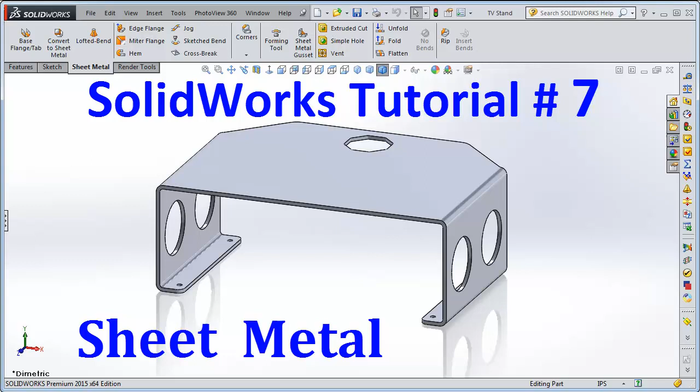This tutorial talks about working with sheet metal, bending items, and coming up with flat patterns. We're going to make this item here. It's very similar to the item we made in the previous tutorial, only this time we're going to make it out of bent sheet metal.

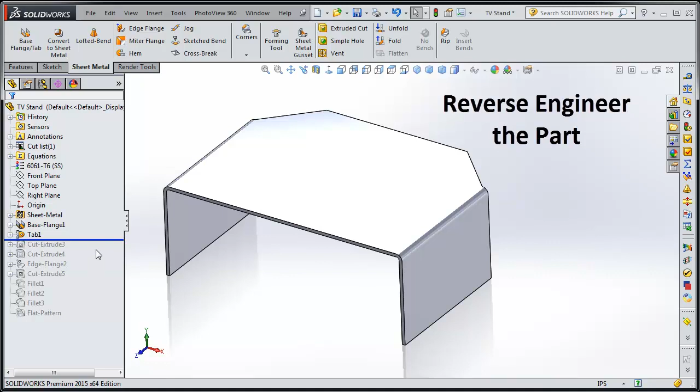So what we should do first is go ahead and reverse engineer this part. We're going to pull this up to our first item, and this is what we're going to make. We're going to go down and add this end to it. We're going to cut some holes through the sides, cut a hole through the top, add some bottom pieces, cut some more holes, and then add some fillets. And then we'll soften up these edges inside.

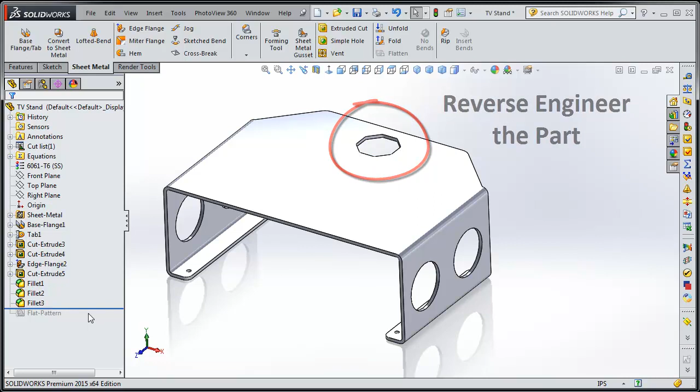Also, we're going to show you how to look at the flat pattern of a bent sheet metal part. And then at the very end of the video, we'll show you how to save it as a DXF file to send to the laser or the water jet.

So let's open SolidWorks. Open up a new part. You can use the tutorial. I'm going to use this part.

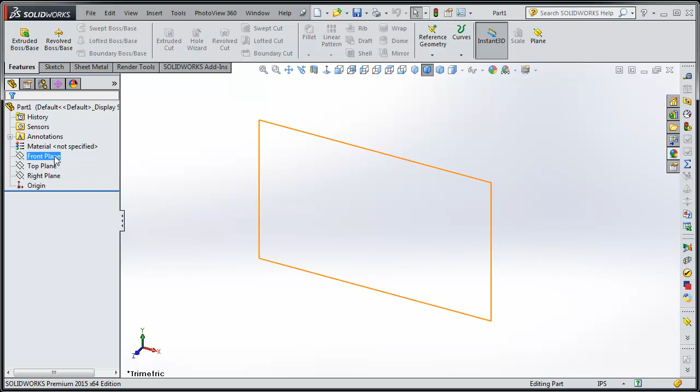Let's start on the front plane. And we're going to draw the shape of our first part of our sheet metal.

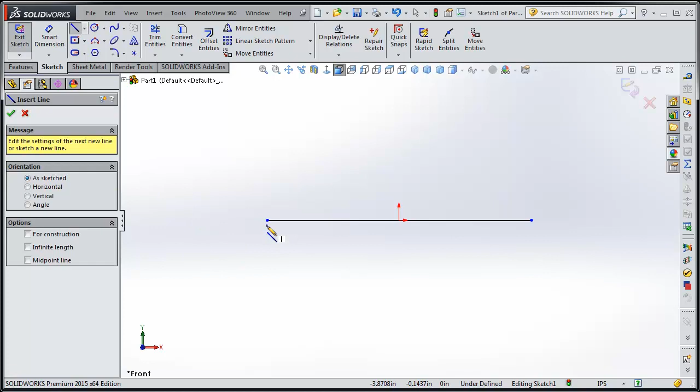Click on the line, hold down Control key, click on the origin. Draw some more lines for the sides. Click on the line, hold down the Control key, click on the line, click equal.

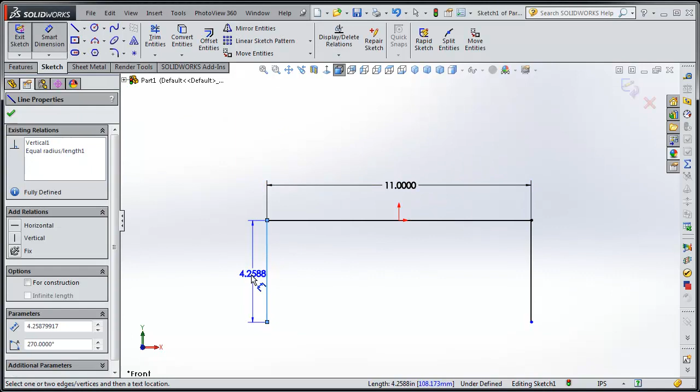Dimension the item, we're going to go with 11 inches, and we're going to go with 4 inches. So we just created a shape.

Now we're going to click on the sketch and highlight the sketch. Then we're going to go to sheet metal. Now if you don't see this, right click anywhere in this area on one of those buttons and you can check it and turn on the sheet metal. If you want to get rid of items, click in an area up there anywhere and then hit the check button or check it off and get rid of it. So let's click in sheet metal.

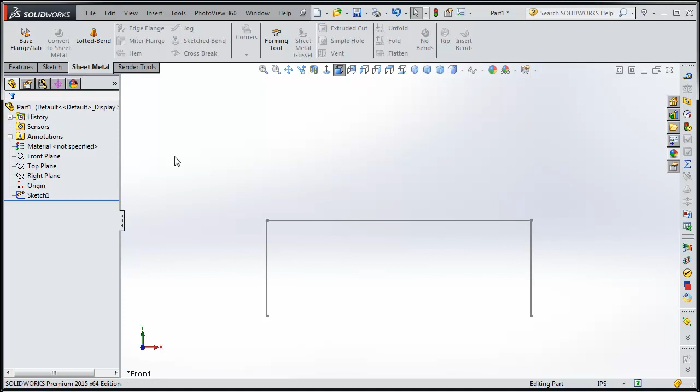Now we're going to highlight the sketch and click the base flange tab. You might not see direction 1, so click those little arrows and you'll see it. We're going to make this 6.625. Thickness of our metal is 0.104. We can reverse that direction. It's easier to see if we look right at it.

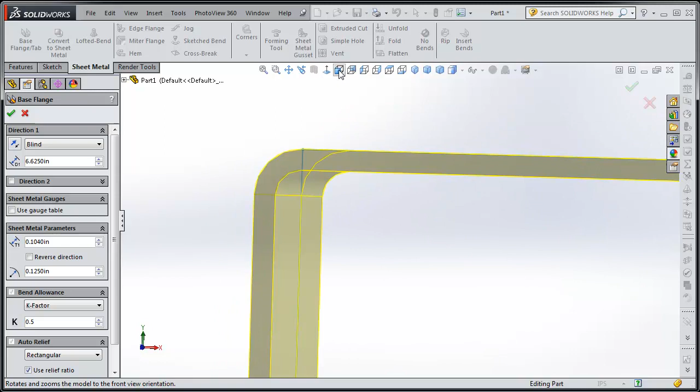You can see our guidelines there, the little blue lines. We can either have the metal inside those lines, so it holds to the 4 inches by 11 inches, or we can put it on the outside, so the inside of the metal will be 4 inches by 11 inches. It's your choice. You can always change it later.

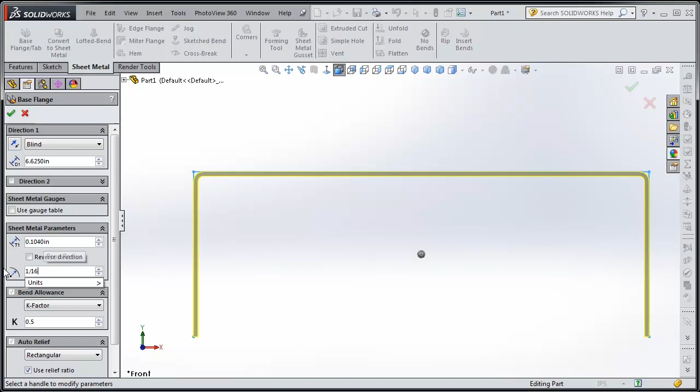And that right there is what the punch will be that goes and bends this. We could make it 1/16 of an inch, a little tighter bend, but I like a little looser bend. So let's do 0.125 radius of the punch tool. And since my metal's 0.136, let's make it 0.136.

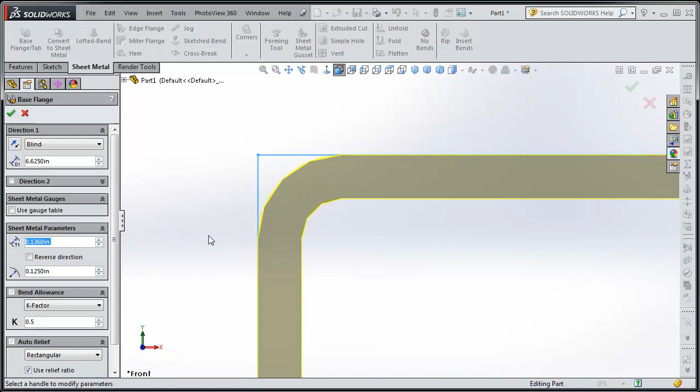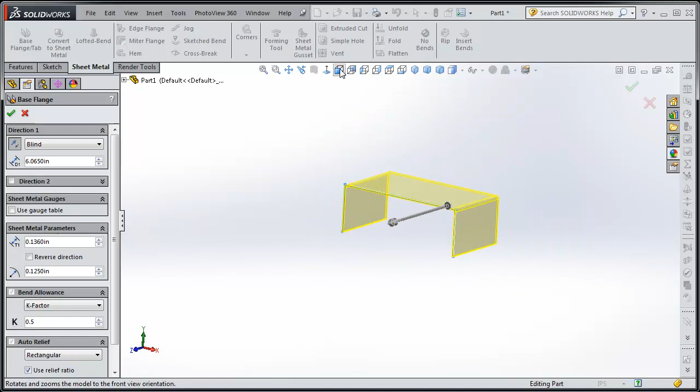Now it's 6.625, but I kind of like it to go the other direction, this direction over here. I could slide it over there, but I rarely do that. I usually just change it up here with this button. I can make it go whatever way I want. Let's set it back to 6.625. 0.065 - I see I changed that a little bit. We'll leave it, that's good enough for now. We can always change it later.

And there's our item. We can flatten it. Gives us some guidelines where it would be bent.

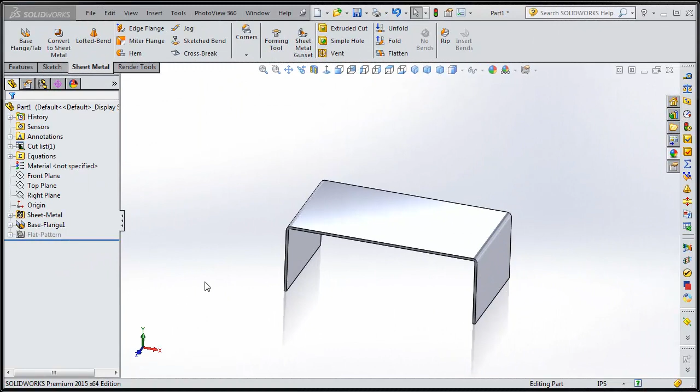Now we're going to add this part to it. So we'll go to the top view and we'll click on it because that's where we want to add it. Click on sketch, sketch again.

Let's go to where that bend starts. We don't want to go past that or it'll notch it. So we can see that where the little orange dotted lines are, that's about where we need to go. Click on the center line, wake it up, and then click on it. There you go.

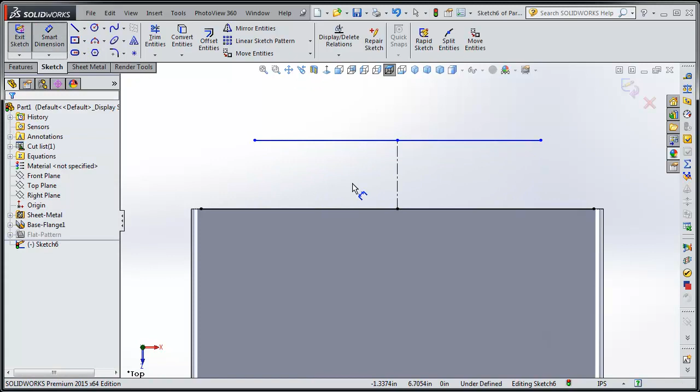Now that was just a guideline. Here's the back piece of where the plate's going to end up. Hold down Control key, click on the dot, and hit midpoint. We're going to run it up 2 more inches.

Going to connect to that other line. I'm going to do it on the other side now. I'm just hitting the Escape key whenever I want to get done with these lines. I just, right now, hit the Escape key, then it goes away.

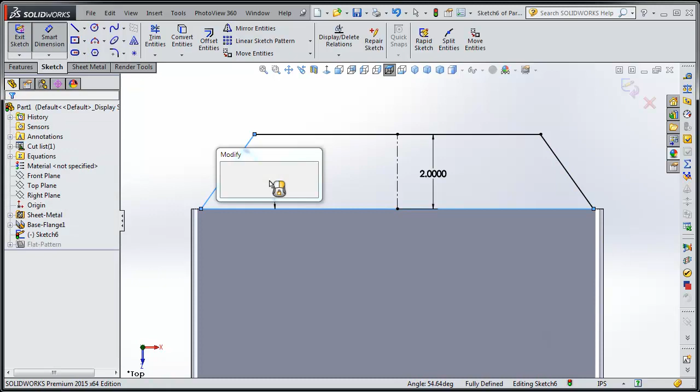Let's dimension that at 45 degrees. And because we have the 2 inches there and the midpoint relation on the back line to the front line, the other angle will be 45 degrees as well. All the lines are black, so we know it's fully dimensioned.

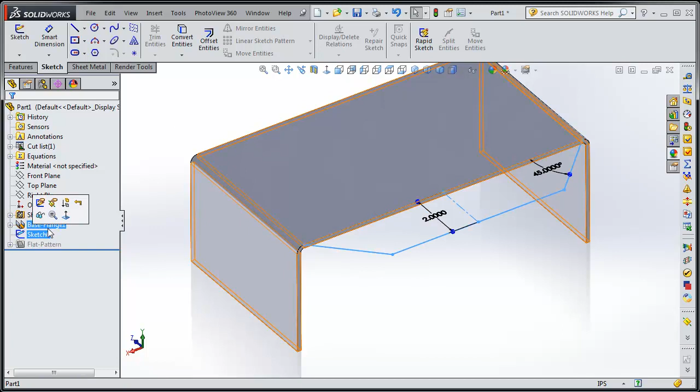Click on the sketch to highlight it. Now we could go to there, but we don't want to do that. We want to go to sheet metal still because we started a sheet metal part. Click on the base flange tab. It automatically follows the way the metal's going to go. And there it is.

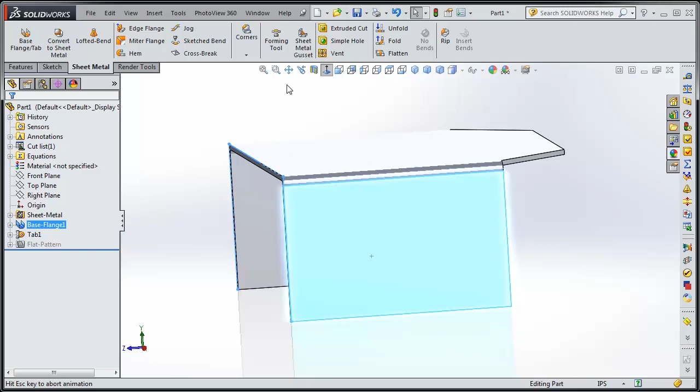Next, we're going to draw some holes in the item on the sides. Let's do it like we did in the part on the last tutorial. Let's do it with the side first. We start a sketch on the side. Then we're going to bring up a center line from the bottom. We're doing it a little different than the last tutorial. Many ways to do the same thing. Click on the line, click on the dot, click on midpoint, holding down the Control key.

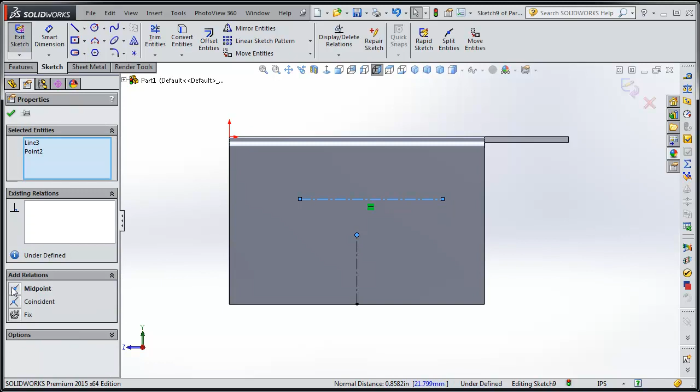Let's add some circles where the holes are going to be. Hold down the Control key, click on the circles, hit equal. We'll make them 2 inches. And then we'll dimension their distance apart.

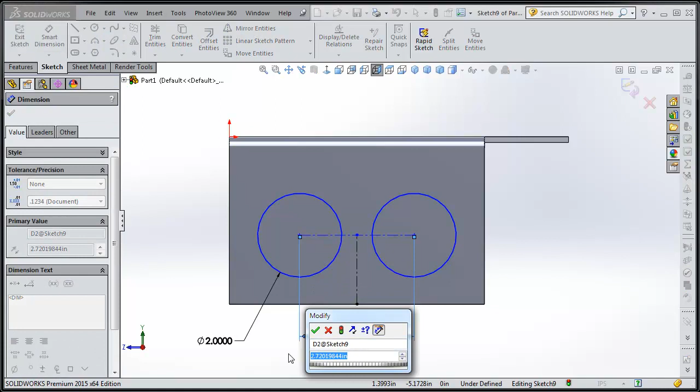I tape these ahead of time and then I put the audio on, so I'm just kind of stuttering here because I don't know what's coming up next a lot of times.

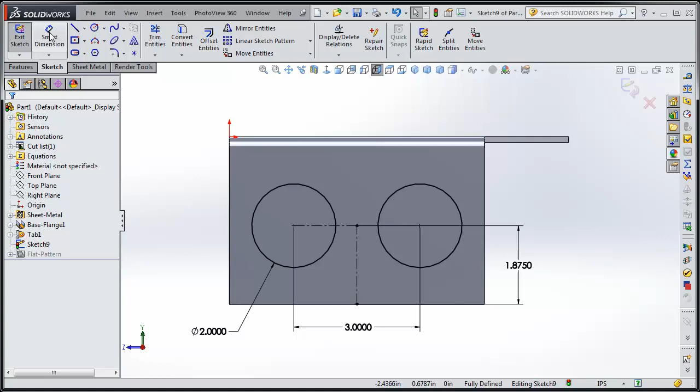So we're going to change this to 1 inch, but we really want it 1 7/8 inch. So 1 plus 7 divided by 8. And then we press enter and it does the math for us, 1.875. No big deal there, but if you need like 15/64, it comes in kind of handy.

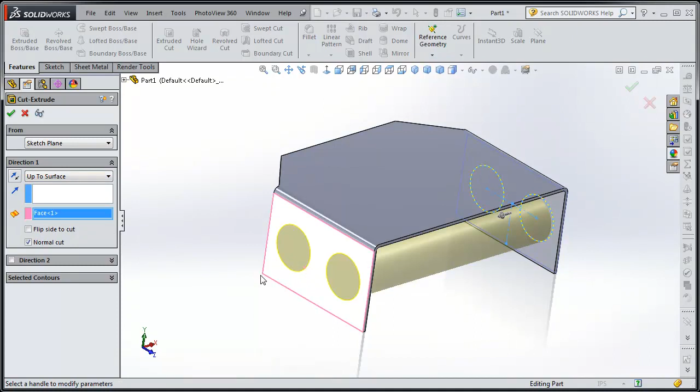Alright, so we're going to run these all the way to the other side. We're going to cut all the way through to that other side. So make sure the sketch is highlighted. Go to extruded cut. It doesn't have to be in the sheet metal area. Any extruded cut will work. And then up to this next surface. And there you go. Just like the previous tutorial, we cut the holes through both sides.

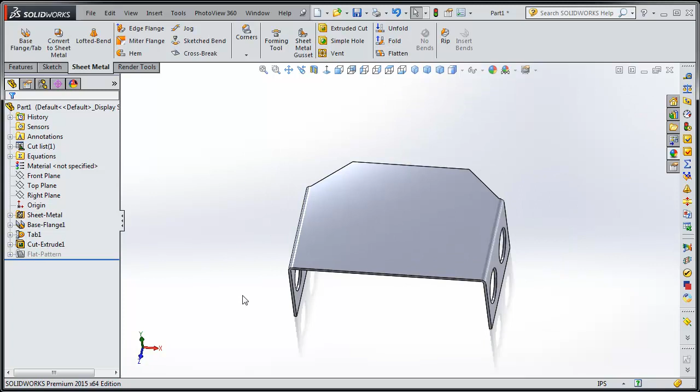We can flatten it. You see it'll cut the holes where it needs to be, and even with your bend deductions, your part will end up correct when you bend it. Now those holes right there, let's go ahead and delete them, because in my videos we do the same thing over and over.

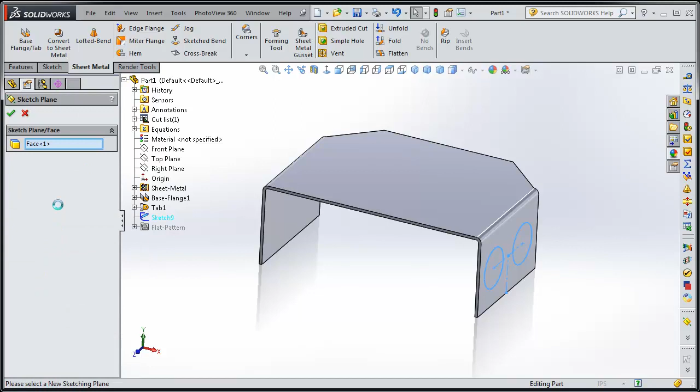Now let's put that sketch right there in the middle. So we right click on the sketch and then go up to Edit Sketch Plane. And then we click on it. And it says it's on face number 1. It is showing there. Now we want it on the right plane, which is really kind of in the center. It is in the center of the part. Click the green arrow, and now we've moved the sketch over to that plane. It's that simple. It holds all the relations, everything. So works great.

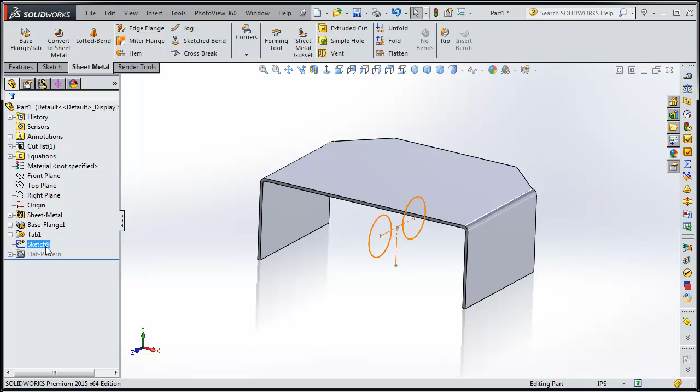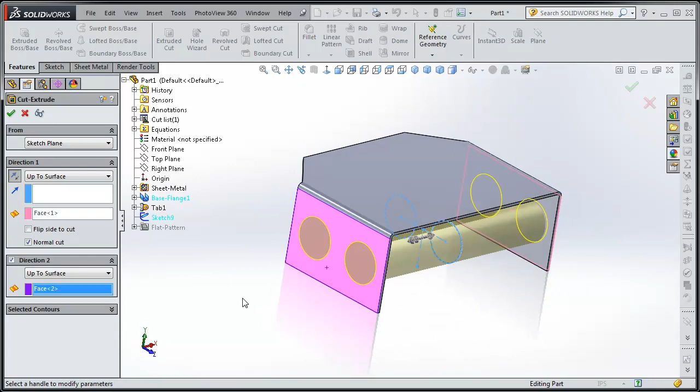Click on the sketch. Click on Features, Extruded Cut. Now this time we're going to go up to surface one way. And then for direction 2, we're going to go up to surface the other way. So there's another way to cut the same holes. If the sketch is showing, click on it, click on Hide, and it'll go away.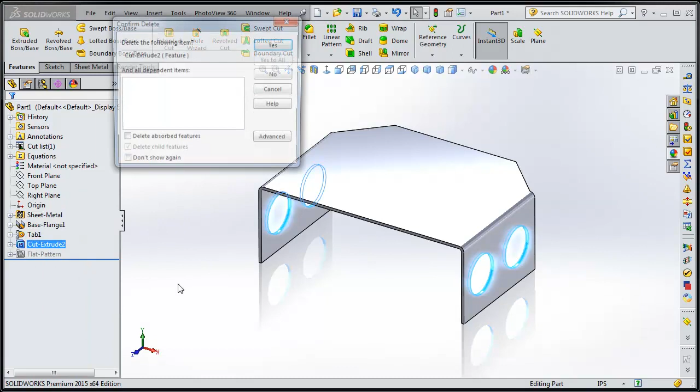So we did the same thing one more time. But we're going to do it again a different way. Now that we've moved the sketch directly in the center, we can hit Extruded Cut, and then we can do Through All Both. And we did the same thing one more time. We can flatten it.

Next, we're going to add this little vent hole on the top. So we're going to go up here to the top.

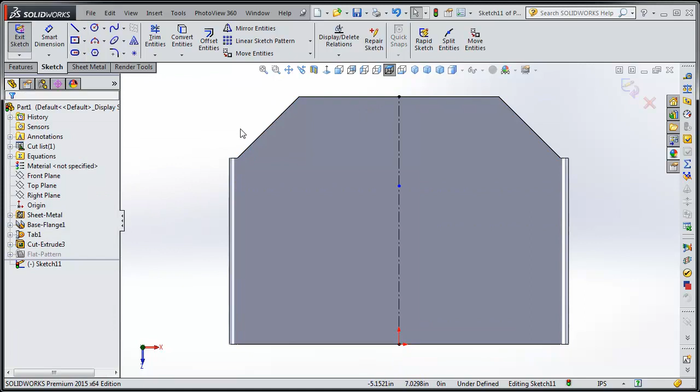Click on it. Click on Normal To so it's a better view. Click on Sketch. I'm going to make a center line, or I like to call them guidelines. And then let's use a polygon. But instead of 6-sided, let's go ahead and make this, how about 8-sided?

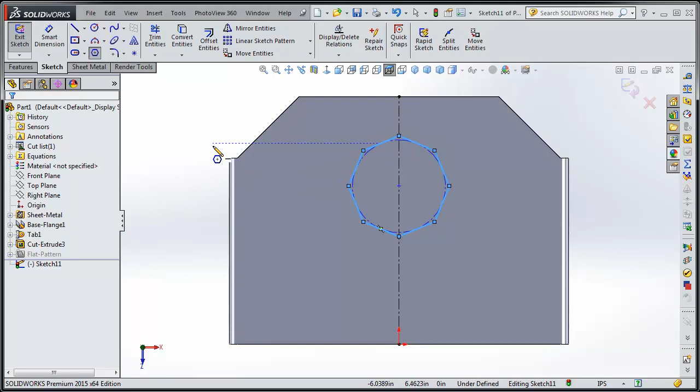Now we don't want it pointing on the top, we want it kind of flat on the top. So hit the escape key and get you out of the polygon. There we go. And you can actually move this around. But you can set up a relation so that you have a flat edge facing up as you're looking at it. So we click on the horizontal, and there you go. And then we dimension it by dimensioning the circle inside of it. So that takes it from one flat edge to the next.

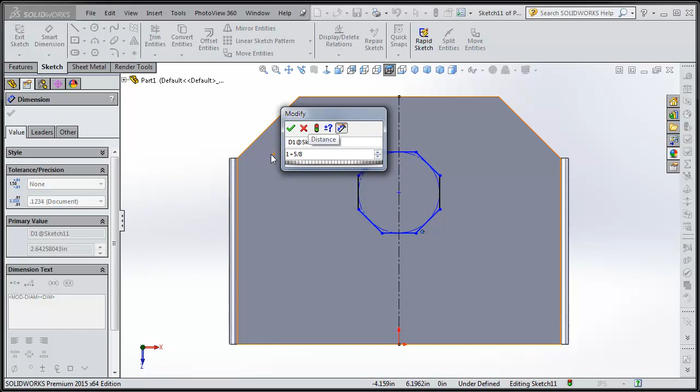The other side, let's make it 1 plus 5/8, so 1.625. Now we could dimension it from the center of the circle to the edge. If you do that, that would be one way we could do it. But we're more concerned about how far that edge is right there from this other edge. So why not just dimension it from there?

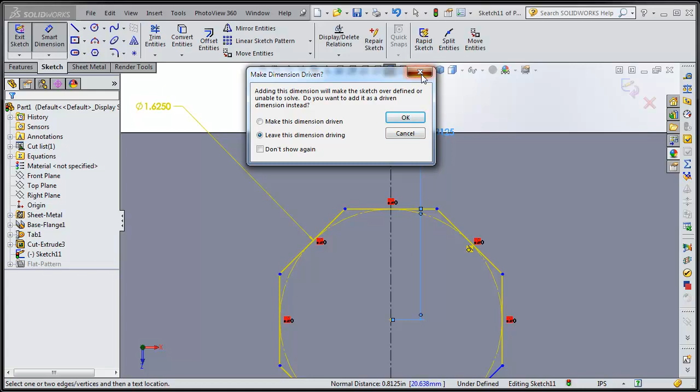Well, if you get a little screw up, no big deal. You probably didn't do anything wrong. Just try it over again. Click on that, and then click up here on this other edge. There we go. And we wanted a 1/2 inch, 0.5 inches away from that edge. So you don't have to dimension from the center all the time. You can dimension from one edge to the other edge if that's the point that matters to you.

I have a bad cough, so I'm just really stumbling through this, stuttering, because I'm trying to keep from coughing.

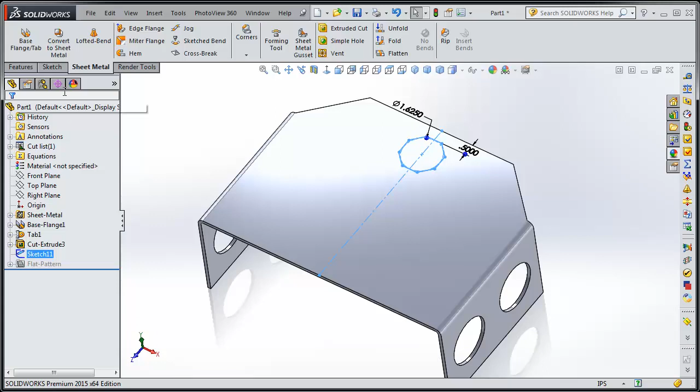So anyway, highlight the sketch, and you can go up to the Extruded Cut in Sheet Metal, or you can go to the Extruded Cut in Features. It doesn't matter with the cuts. You can use either one you want. So we're going to use the one in Features. But there's this interesting thing. With sheet metal, you have a link to thickness, because you set your metal thickness. So any of these cuts that you make, you can go ahead and set them to the thickness.

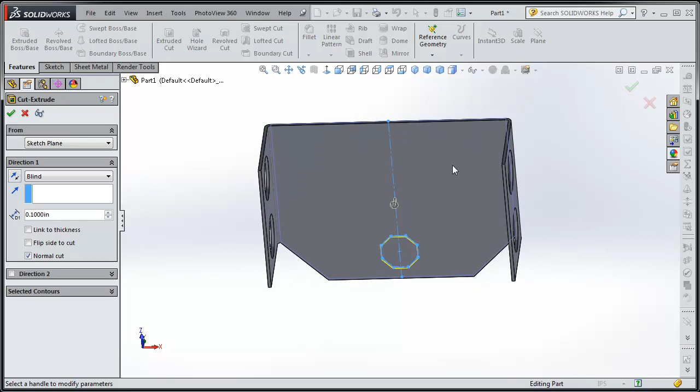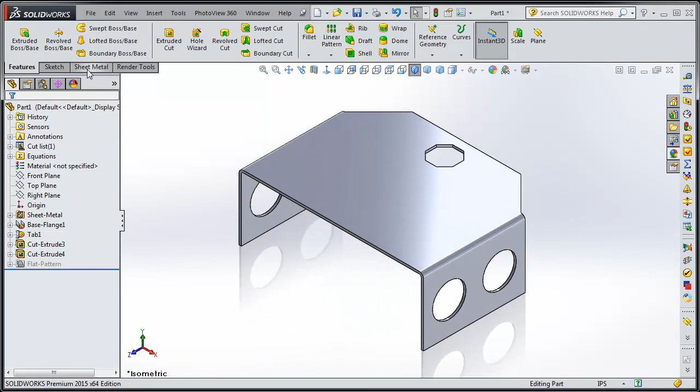If it's just going through the metal. Now those sides wouldn't have worked because we were going all the way from one side to the other side, so you would have had to do one side at a time. But for now, let's just try that link to thickness. And as you see, it's just kind of like going from surface to surface, and it cuts right through. It's kind of handy on some parts. That way, if you change the thickness of your sheet metal, your cuts won't only go partially through if you're using a blind depth. So as you can see, you can flatten it. Everything looks good.

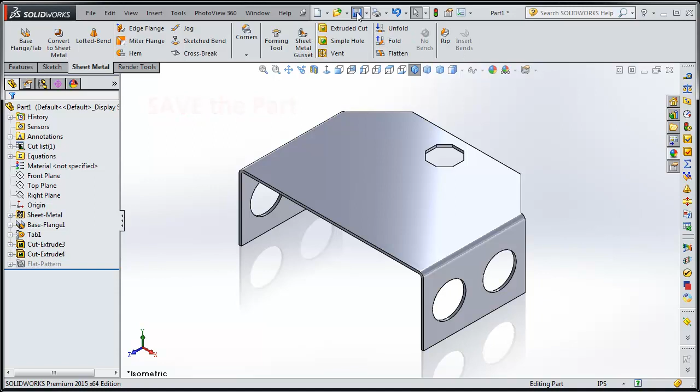And we have that. Next, we're going to put these little tabs or feet onto this little TV monitor stand. But I haven't been saving the part. I would have suggested long ago to save the part if I would have noticed, but save your part a lot. Do it right away so you don't lose all your work. So we'll go ahead and save it now. But now we're going to put those little feet on. Tabs, edges, whatever you want to call them.

So we're going to use this edge flange. It's going to ask us for which edges we want to put it on. And we can pull it either direction. We can use all these features, but for right now, pick your edges. We're going to pick there. We can slide it this way or that way, but we want it to come in. Click it there. Now we could have stopped there, but we can do both of them at the same time. And we just click on that edge, it'll make them equal, so we can make them both the same length. If you wanted them different lengths, it might be easier just to do them one at a time.

Let's go ahead and set them to be 1 inch. And there's some interesting things here. It's best if you just play with those, then you'll see what they do. Same with this material outside. We're going to use the material inside. Sometimes you do the bend outside, but you have to play with it. If you're doing sheet metal, you should understand sheet metal, but do the material inside, because what it's going to do is it's going to keep all the material inside of our 11 inches there. So that's what we're going to use.

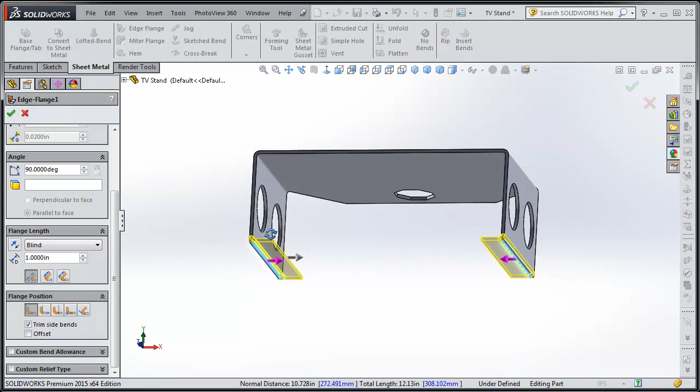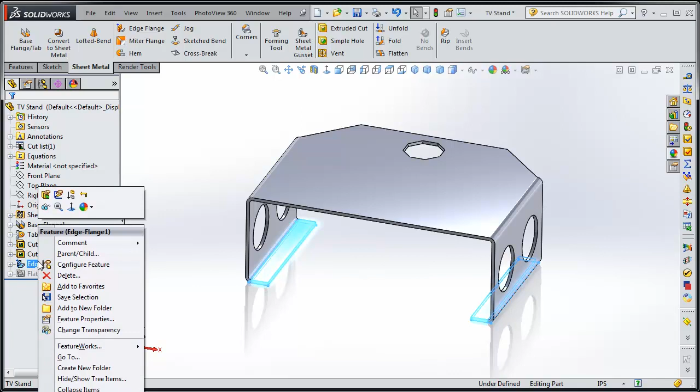This part wasn't so crucial on that, but those first two edges we did, if we would have made them through this way, would have mattered. I'm explaining too much here, just kind of follow the video and you'll see. Just click on the two lines and they'll kind of happen for you. There you go. Best way to do it is just get in there and play with that, try different settings. So I chatted a lot there, so we're going to do it again really quick here.

So to start off, we go to sheet metal, hit edge flange, click on the lines to get some edge flanges, set their length at 1 inch. We're keeping the settings. Click the green arrow. So it's that easy.

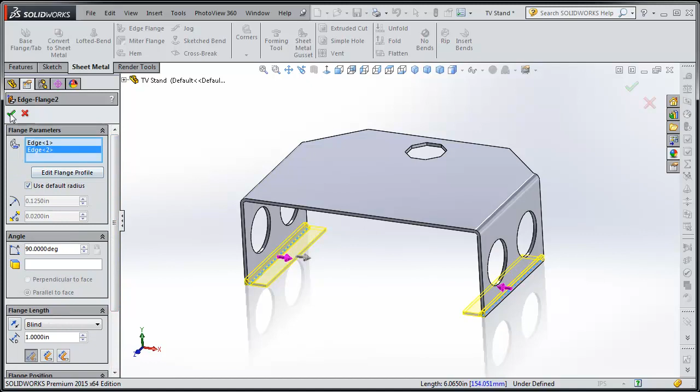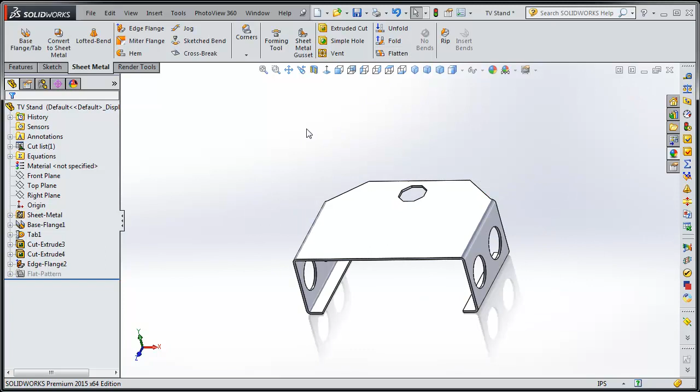Save your part. You can flatten. And you see, it gives you all the little bend lines. In your drawing, if you made a drawing from this, it would tell you exactly how far you need to set your CNC press brake to bend those.

Now we're going to put in these little holes in the bottom in case you wanted to screw in some little rubber feet to this or wheels or whatever you want. So we need to go down and do it off of that edge. So hit the edge, hit normal to. It'll kind of take you right to it. Click on it. Click on sketch.

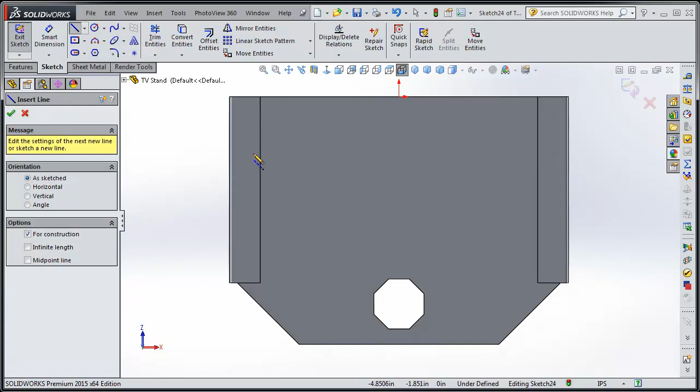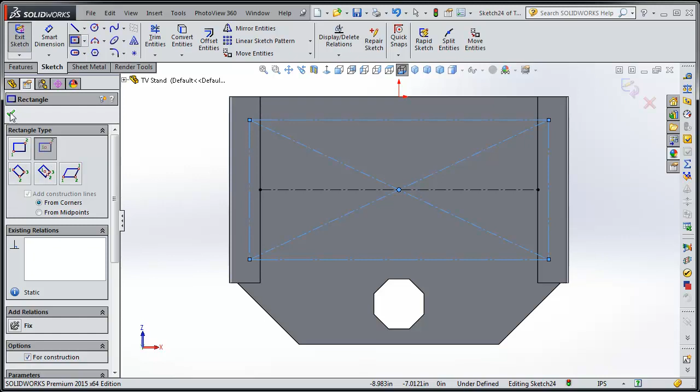Now, if we use that line there, we can probably use the midpoint of that and use a rectangle guideline to make our holes. Kind of speed up the process. So if we click in the center of that now, pull out a rectangle, and don't do anything, leave it highlighted light blue like that, and click on for construction, and it'll make it the dotted lines, the guideline. Now we can draw our circles on that, and it'll hold them all together. Little time saver.

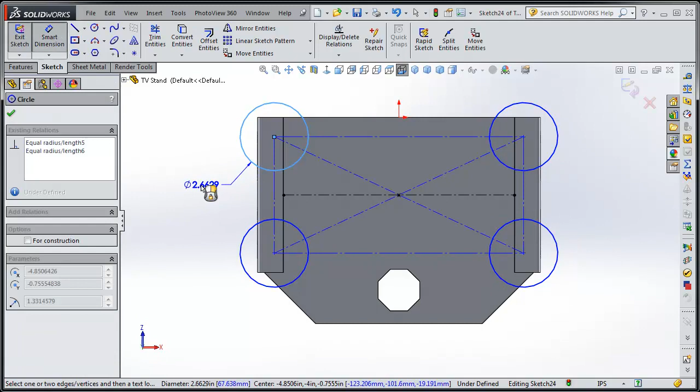Once again, hit escape if you need to get out of the circles. It's still making circles. Hit your escape key. Hold down the control key, click on all the circles, click equal. And now all you have to do is dimension one of them. And we want to make it a little bigger, so let's make it 3 divided by 16, or 3/16, or 0.1875. That math is kind of handy if you're using fractions.

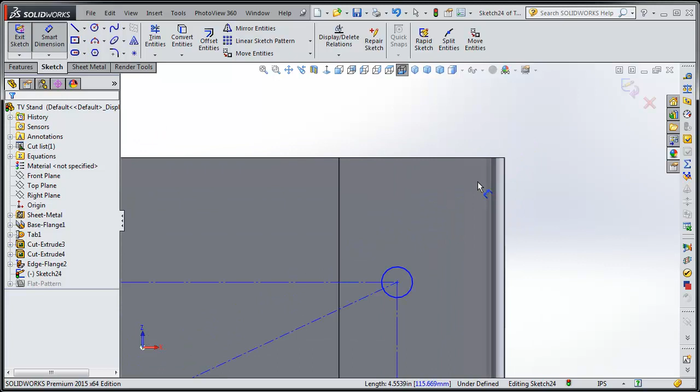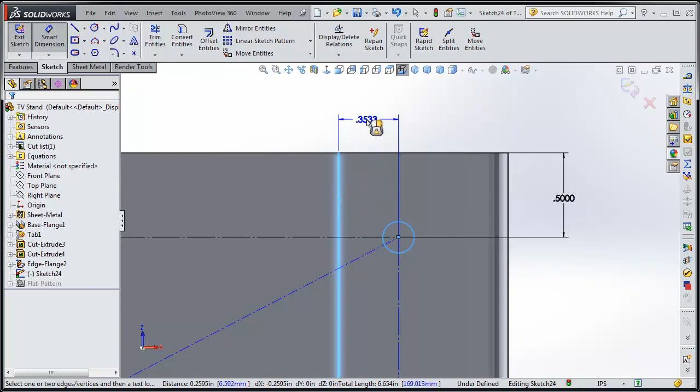So this is where it matters. So it's dimension from there, to the center of the circle. Let's make it 0.5. Once again, not set in stone. You can change all this stuff later. And let's make this 0.5.

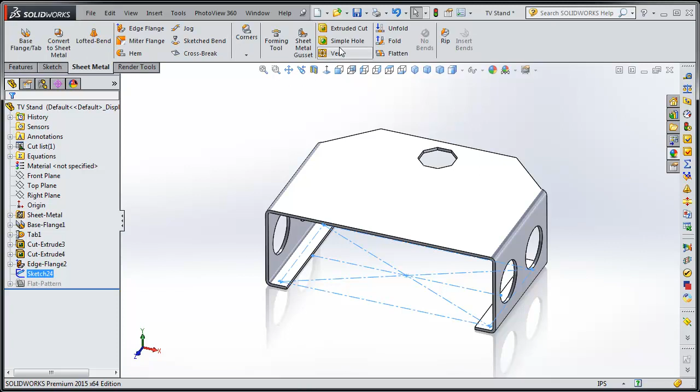And then let's go ahead and go through that. Now, since we used the link to thickness, it'll probably still hold that. So if we click on Extruded Cut in Sheet Metal, yeah, it went automatically to link to thickness. Now, we don't like that hole. It's a little close to the edge. No big deal.

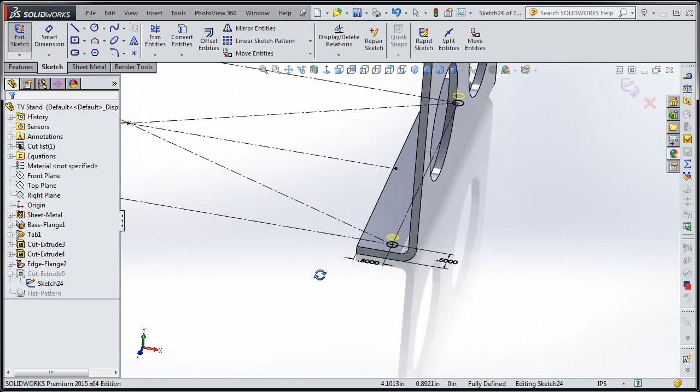Go down. Right-click on the sketch. Click on the sketch to open it. Just go down there and find the dimension you don't like and change it. And since we used that little guideline rectangle, all we have to do is change one and it changes them all. There you go.

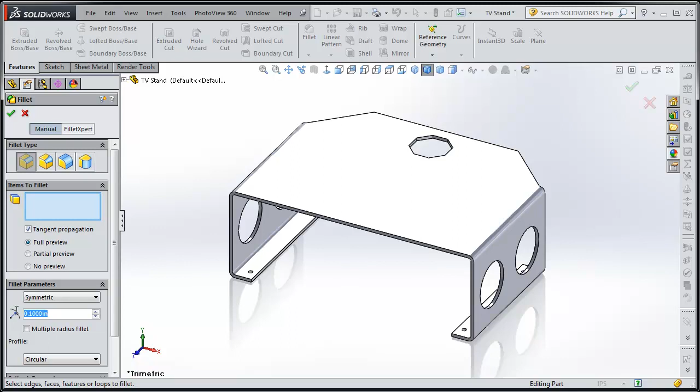Now we're going to put some fillets on this because we don't want any sharp edges to catch on cords or fingers or arms or anything. So let's go ahead and set these fillets. Let the laser or the water jet cut them for us, so we're not having to worry about them. And let's do some on the back, but let's make those a little bit larger. How about a radius of 0.5? Kind of soften up the edges a little here.

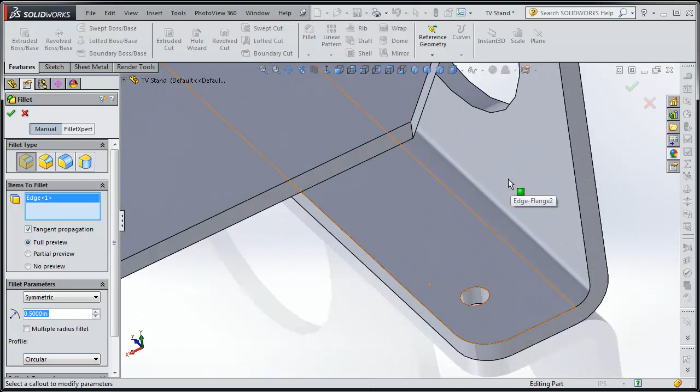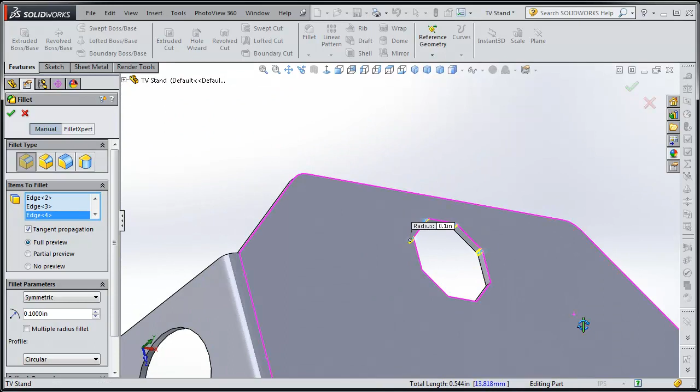There we go. Now we're going to have a cord running through this back hole. So let's soften up those edges as well. That'll make it a little easier to run our deburring tool. If you happen to hit the wrong thing and it turns a big blue area, just click on it again, it'll go away. There we go.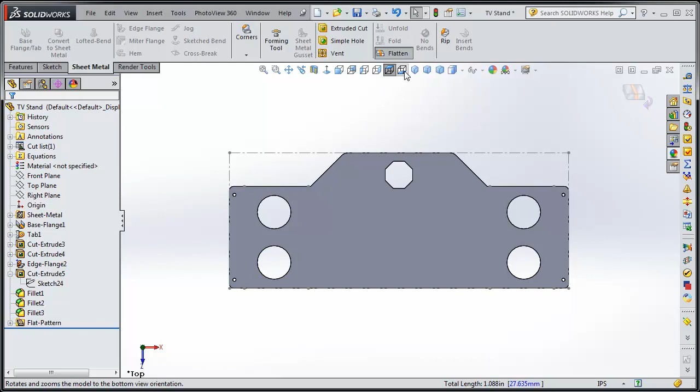Now we have the top hole. We can flatten it. Everything's holding true. You click flatten again to make it go back.

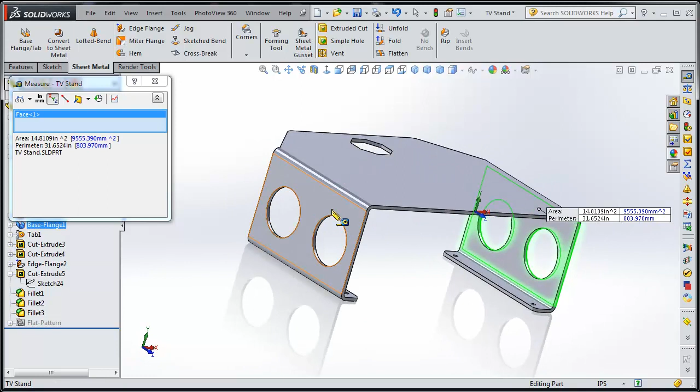Now if you don't understand bend deduction, read about them, because your metal won't be 11 inches plus 4 inches plus 1 inch. It'll actually have less metal or more metal depending on the number of bends, because you have things that are called bend allowances or bend deductions. But what we care about is this 11 inches, and that's going to hold true. So when the laser cuts this metal, when you bend it up with the bend lines that it gives, it'll give you 4 inches by 11 inches.

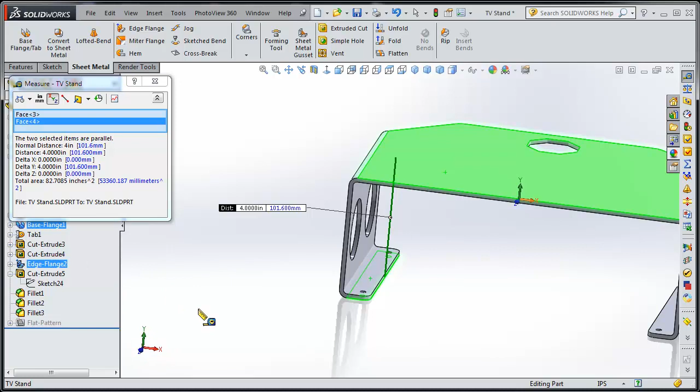So when we drew it to be able to measure it, that's why we set it up this way. So we could check to make sure that our finished part now would be the correct dimensions. Let's check the weight. So if we go to mass properties, we can see that it says it's 0.61 pounds. Now, I think that's like a water weight. It's just a normal weight when there's no material set. So you need to set a material weight.

So go to material and click on it, right click on it, click on edit material, or you can use one of these that are down here in your favorites. To manage your favorites, you just go to manage favorites and then go up to SolidWorks materials, pick a material you want to add to it, click on it, and then click on add. And I'm not going to do it because I already have my favorites done. So I'm just going to go to my material, right click on it, and then I'm going to go down to

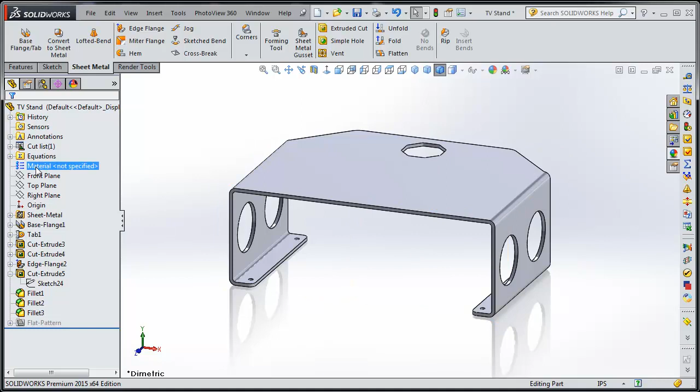A36 steel. Now that may not be the exact thing for this, could have been cold rolled or hot rolled, but we're just using it as an example. Now we're going to measure it. The mass properties. Now it's going to be 4.79 pounds. That's not going to change a lot from this to cold rolled or hot rolled. But it is going to change a lot if we change this to aluminum, 6061 T6.

This is a great way to see if you want to make your part out of aluminum or steel, or what it's going to weigh when it's done. Works in assemblies too, 1.65 pounds. I use this all the time. People want to know how much their things are going to weigh when they get all put together. So there you go. Gives it a nice little view. It kind of looks like aluminum. If you don't like it, you can get rid of it with remove appearance.

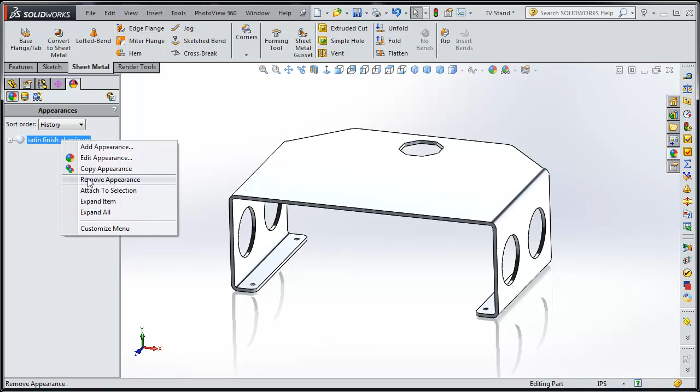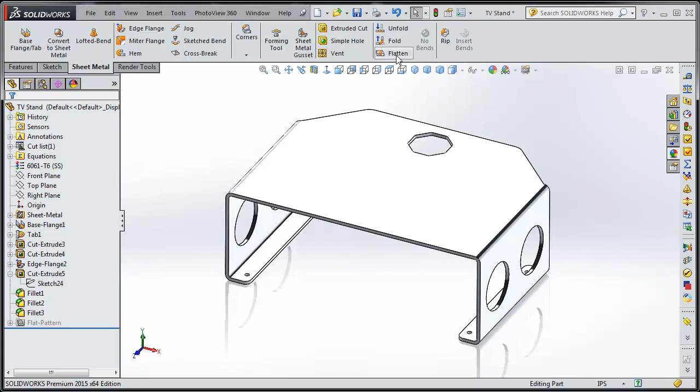It's no big deal on this aluminum, but when you get some of the darker colors, you know, it's harder to see. Like, not so much on bronze, but you can change it to whatever you want. Just because it says it's aluminum, you can give it a bronze or a purple or anything you want. If you don't like it, hit undo. So it gives it a color when you give it a material, but you don't have to keep that color. In a future tutorial, we'll show you all about colors and textures. So that's our item.

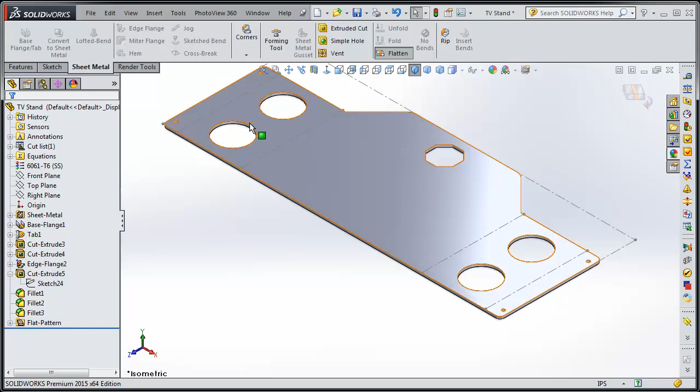Now we're going to go ahead and get rid of that aluminum finish. You don't have to, I just wanted to show you how to do it. Remember, it stayed aluminum for the material, so your weights and everything will stay the same. Just makes it a little easier to see if you're going to work on some more items here. Now, make sure to save it. You see that little star up there next to the TV stand; when you hit save, that goes away, so now it's saved.

Now we're going to save this as a DXF file, an AutoCAD legacy type file. So I like typing what it is in front of it. It just helps me find it. You don't have to do this, but I like doing that. And then we're going to go up to DXF and click on that. Now it's going to save it as a DXF. If you look at the options here, we pull those down. I use the 2000 to 2002. It seems to work on most machines just fine. So if you use those settings, it seems to work on everything you send it to.

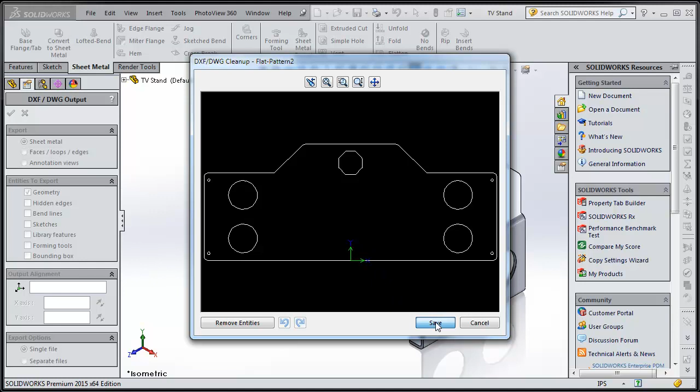So now it's going to save as a DXF. And you can choose some different settings here. I'm just going to save it like this. It'll probably work just fine. Something you can play with, different items there. It kind of calculates for a little while and gives you a preview. And if you like the preview, go ahead and hit save. And now it's done. You have a DXF you can send to a laser or to the water jet. Now mine comes as an eDrawings icon, but it's a DXF file. Those are just my video capture items that I use to make this video. And there you go.